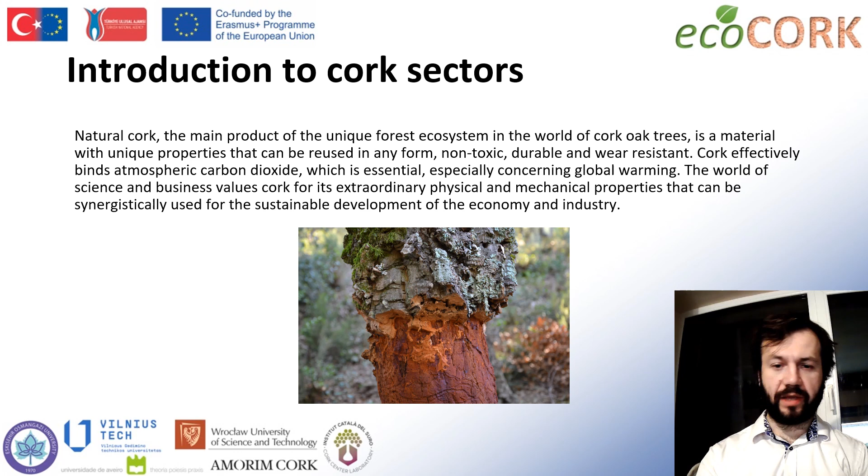The world of science and business values cork for its extraordinary physical and mechanical properties that can be synergistically used for sustainable development of economy and industry. Cork is a versatile and sustainable material with a wide range of uses in many industries. It is naturally waterproof, fire retardant, and environmentally friendly.

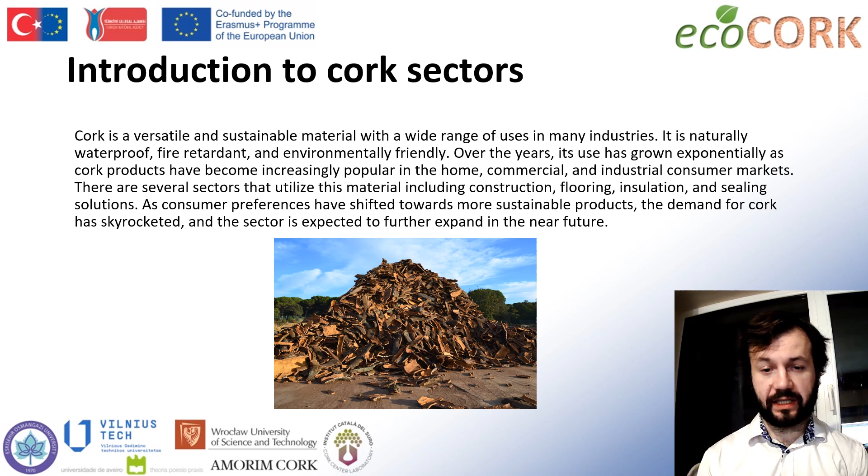Over the years, its use has grown exponentially as cork products have become increasingly popular in home, commercial, and industrial consumer markets. There are several sectors that utilize this material, including construction, flooring, insulation, and sealing solutions. As consumer preferences have shifted towards more sustainable products, the demand for cork has skyrocketed, and the sector is expecting to further expand in the near future.

In recent years, the cork industry is gaining new fields of industry. Cork as a material has fascinating properties which can significantly improve current designs. Fields of cork material applications are as wide as stoppers for still and sparkling wines and spirits, automotive and railways, micromobility, aerospace, sport, hand device interface finish, architecture and design applications, including floors and wall coverings, construction and infrastructure, such as cork underlayment, and fashion and furniture.

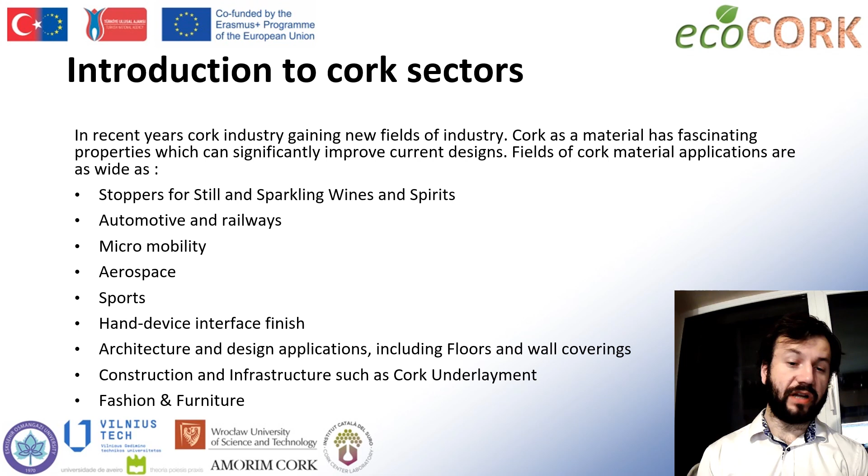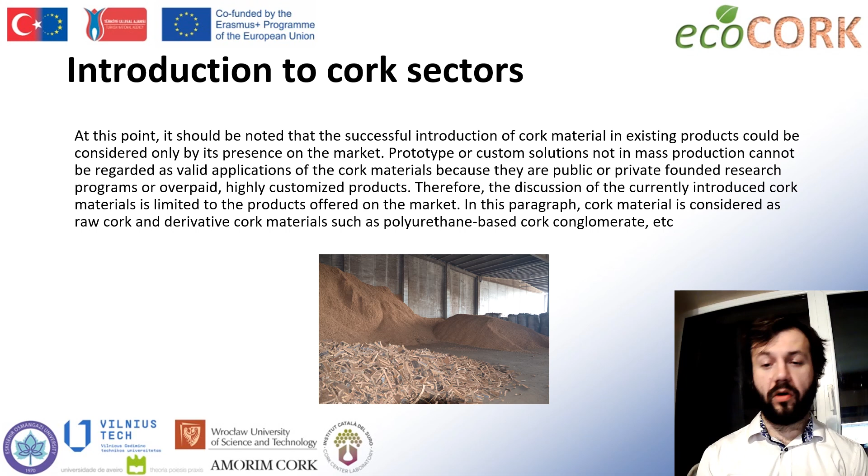At this point, it should be noted that the successful introduction of cork material in existing products could be considered only by its presence on the market. Prototype or custom solutions not in mass production cannot be regarded as a valid application of the cork material because they are public or private funded research programs or overpaid, highly customized products. Therefore, the discussion of the currently introduced cork material is limited to the products offered on the market. In this paragraph, cork material is considered as raw cork and derivative cork materials such as polyurethane-based cork conglomerate or other cork-based composites.

Cork is one of the most versatile natural materials. It has a wide range of applications from simple bottle caps to specialized aviation heat shields. It is light, compressible, elastic, durable, chemically and biologically resistant, non-toxic, flame retardant, practically impermeable to gases and liquids, shows good thermal and acoustic insulation properties, and it is also an excellent vibration and electric insulator. The unique cork properties result from its honeycomb-like cellular structure.

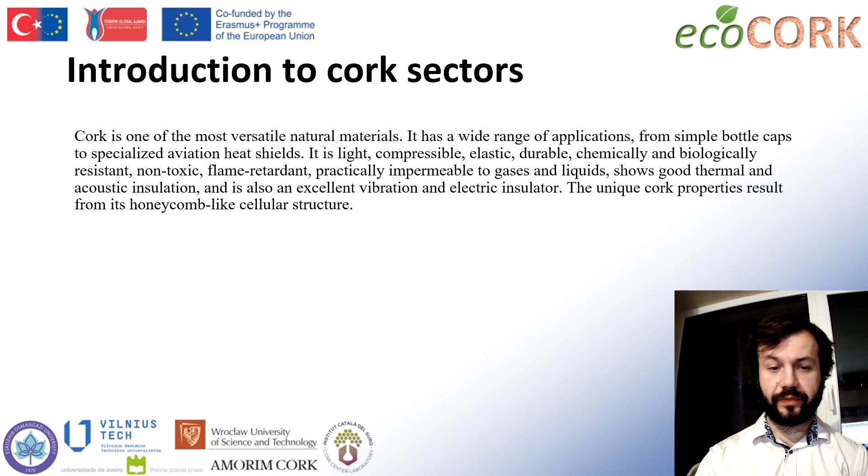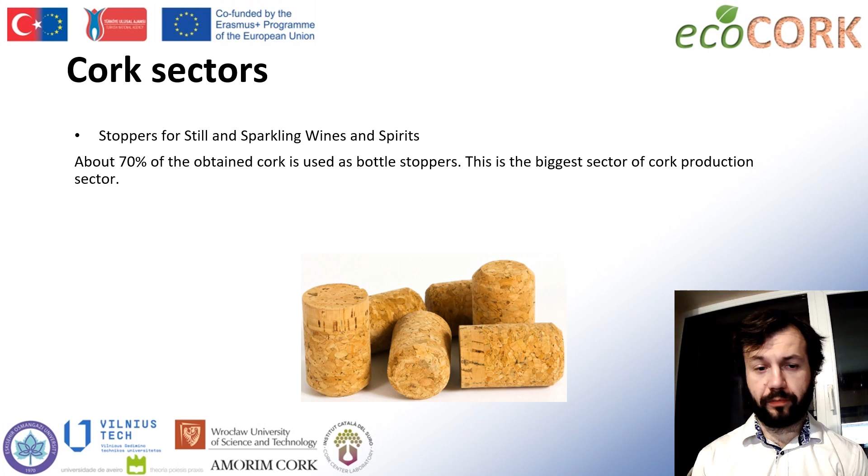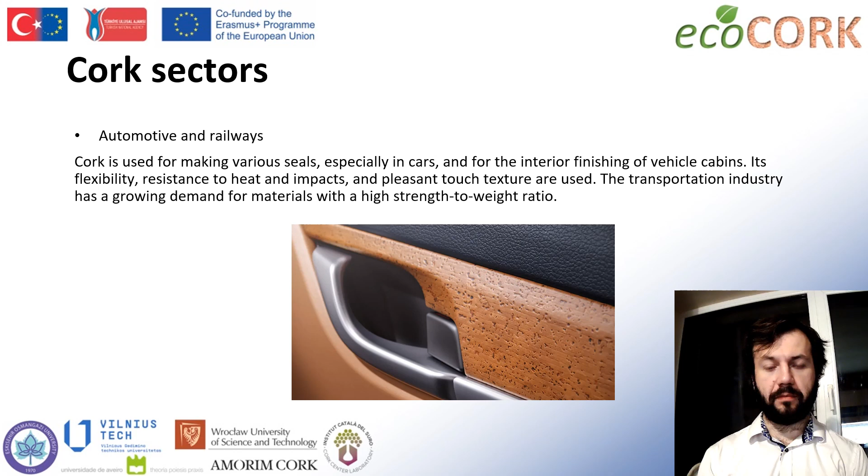Cork sectors. Stoppers for still and sparkling wines and spirits. About 70% of obtained cork is used as bottle stoppers. This is the biggest cork production sector. Automotive and railways. Cork is used for making various seals, especially in cars, and for the interior finishing of vehicle cabins. Its flexibility, resistance to heat and impact, and pleasant texture are used. The transportation industry has a growing demand for materials with a high strength to weight ratio.

Aerospace. Cork is assumed as a heat protection shield material for test missions where spacecraft will re-enter the Earth's atmosphere. During re-entry, each spacecraft experiences high thermal loads due to air friction against the spacecraft structure. During the Space Shuttle era, space shuttles were covered with ceramic panels. One of the hypotheses is that cork material might be used for re-entry shielding. Low burn regression and high thermal insulation properties at high temperatures have great potential for cheap and non-complicated manufacturing of heat shields for re-entry.

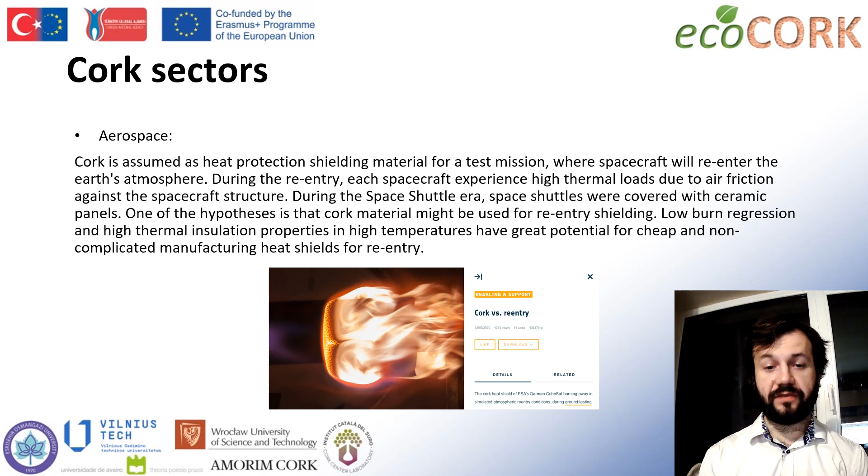Sports and hand device interface finish. Cork composites are prepared from agglomerates of various granulation, usually 0.5 to 30 mm grain size. The granules used are usually waste from the production of plugs. The granules are mixed with a reactive prepolymer and pressed at room temperature, or mixed with the polymer binder and pressed at elevated temperature under pressure to produce cork composites.

The intended properties of finished products depend on the dimension of cork granules, its mass fraction in the composition, which might be up to 90% by mass, the type of the binder, polyurethane, phenol formaldehyde resins, etc., and the packing density of the agglomerates used in the production process.

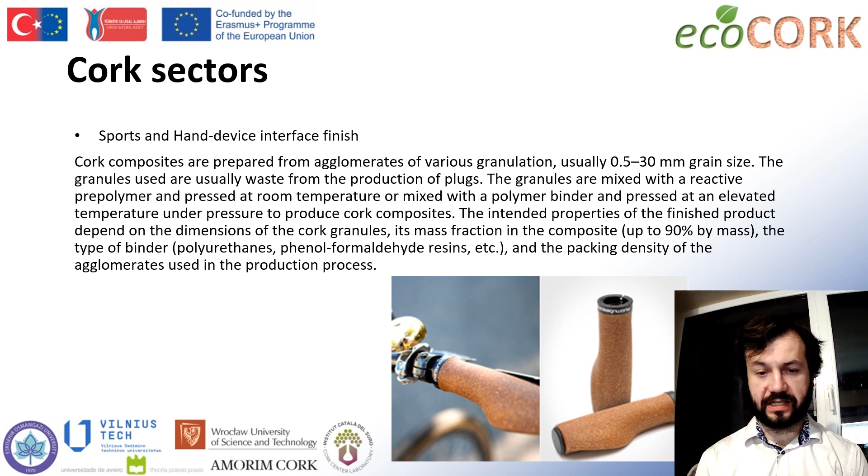Sport and hand device finish. In the continuing section, the block of cork agglomerate is produced as a laminate shaped according to the planned dimensions and smoothed. They are used to obtain panels, boards, shoe inserts, handles, grips, something you can see in the pictures. These are hand device interfaces where humans are touching devices with a nice and pleasant cork finish.

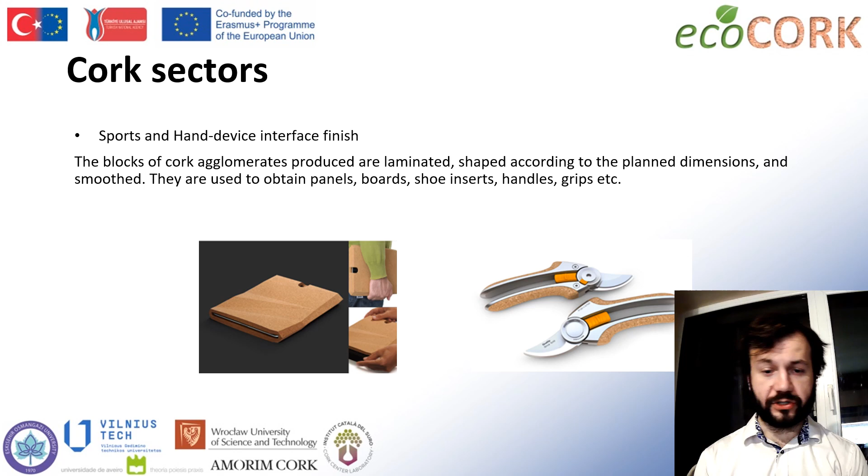Architecture and design applications including floor and wall coverings. The usage of cork in architecture is widespread. Due to its attractive structure and positive experience for the human hand, cork is very common in any type of architecture, from household accessories to major decorative roles in large buildings and artistic installations.

The construction industry is the second largest area where natural cork is used, in soundproofing walls, suspended ceilings, wallpapers, floor coverings in buildings, and insulation in industrial cold rooms. Cork is characterized by small thermal conductivity, sound propagation speed, and acoustic impedance, making it suitable for use as a material for thermal and sound insulation. The cork composite used in this way contains 90 to 95% cork by weight in a polyurethane matrix.

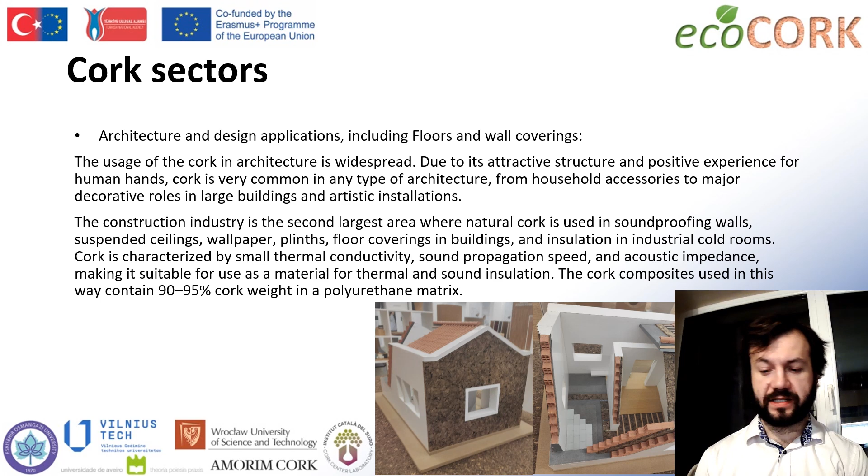Fashion and furniture. Cork material, recognized as a green and sustainable material, is widely used in the fashion industry. In this field, trends play a significant role, which is why the quantity of application will vary in the following years. Fields of application in the fashion industry are decorative, cork fabric, liners, shoemaking materials.

In this sector of economy, where manufacturing companies make strong declarations about ecological and sustainable material usage, it is expected that cork material with other natural-based materials will be more present.

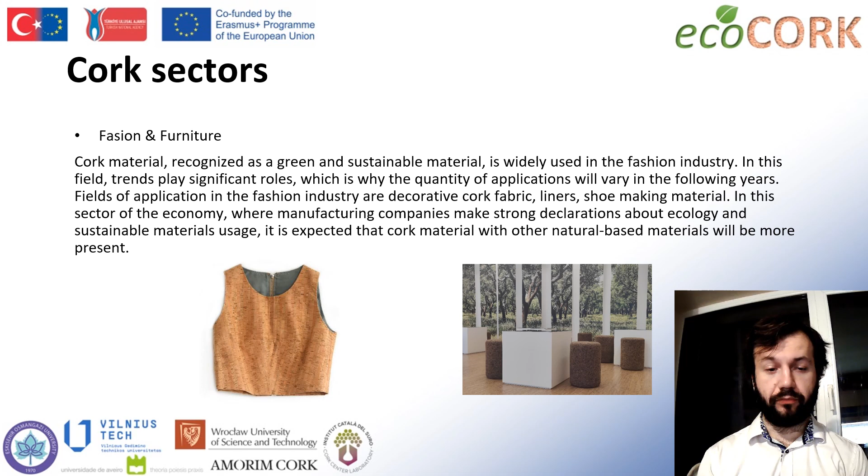And right now we will switch to a second section of this lesson presentation, Introduction to Future Trends for Cork. And we'll focus on the cork products driven by unique cork properties or combination of these properties.

Cork-based sandwich materials. This is a material which has aluminum skin with cork agglomerated core. Core materials are divided into natural or synthetic core material, such as wood, plywood, hemp, straw, or cork. The bottom left panel, which you can see here, is created with the balsa wood core material with perpendicular grain direction to the panel surface.

Two other panels are created with the synthetic cores that have aluminum honeycomb and the foam cores. The rest of the panels have cork cores. It is essential to mention that in the sandwich structure, volume of the core material may be up to 95% of entire material, thus ensuring a high degree of usage of eco and sustainable materials for the core is crucial.

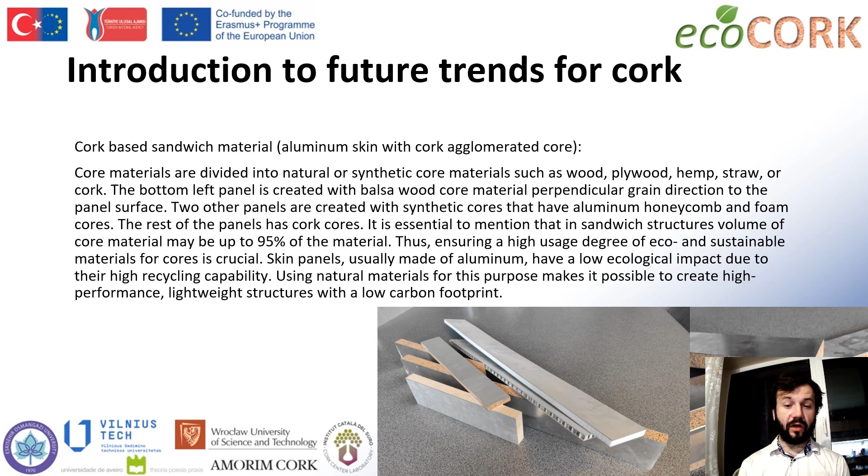Skin panels, usually made of aluminum, have a low ecological impact due to their high recycling capability. Using natural materials for this purpose makes it possible to create high-performance, lightweight structures with a low carbon footprint.

And this is a first case study, a case study for the lightweight panels which are suited for the fast rearrangement system for passenger train interior. The project assumption and design. So the lightweight panel structures are a good choice for quick rearrangement of the vehicle passenger space. They might be used for the temporary walls, floor, and ceilings. These kinds of panels usually are sandwich structures.

Outer panels are made of the skin material, ensuring rigidity and carrying most of the loads, while inside the core material is lightweight material and has a support role for the skin material. Core material is glued to the skin panel and prevents buckling.

At this point, it should be noted that neither skin panels nor core material can withstand even a small portion of the loads that properly glued sandwich material can, mostly due to the loss of stability, usually referred to as buckling. Okay.

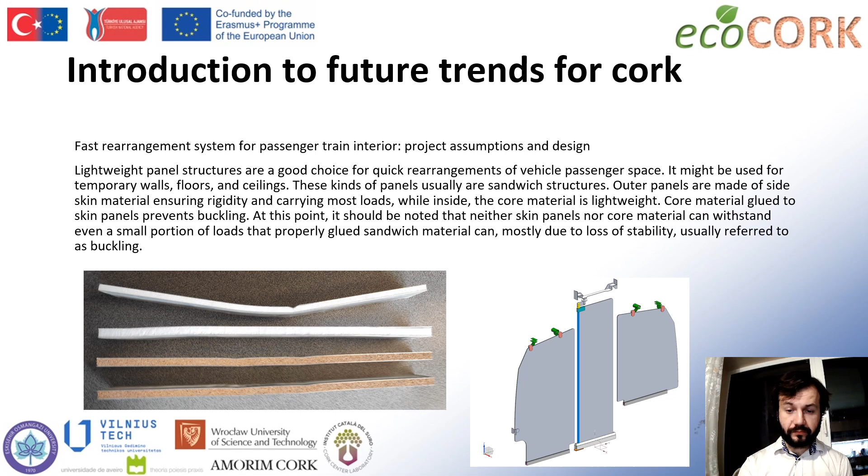And as a continuation of this case study, I would like to introduce finite element analysis, which allows determining stress in material and deformation of examined geometry against applied loads.

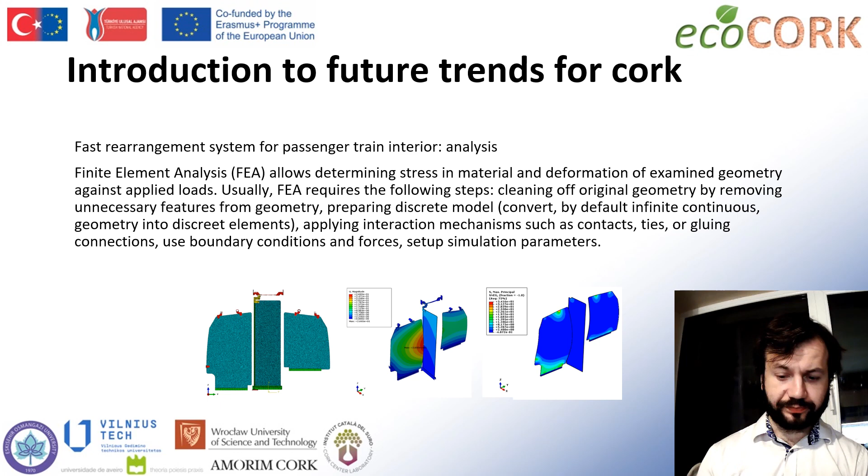Okay, moving forward to the second case study. Here it's a case study of the frontal protection system. So in this chapter we introduce the reader to the case study from the assumption to the final product, in which the authors present the approach to use the cork composite in the automotive sector. The research aimed to improve the safety of vulnerable road users by developing and implementing a frontal protection system which mitigates injuries during an accident with a vehicle.

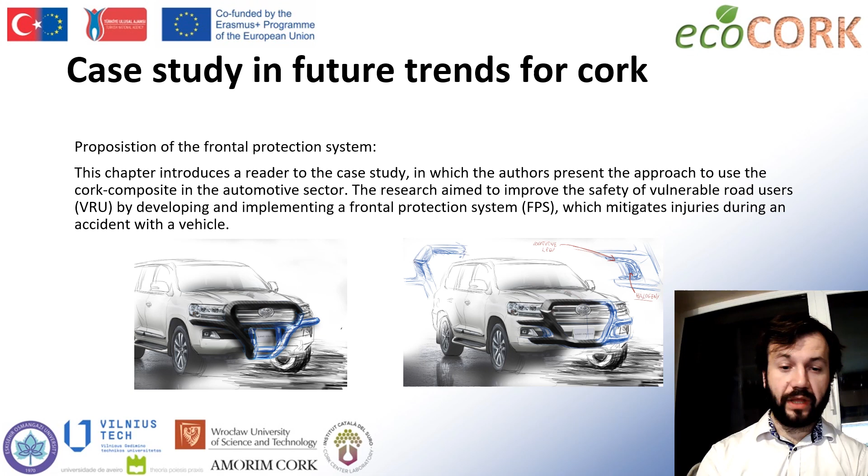Okay. So, due to the trend for the purchase of SUVs in Europe and their more frequent participation in accidents involving pedestrians and cyclists, as SUVs are commonly used in the cities, the authors identified a need for a safe frontal protection system.

The designed FPS provides pedestrians and cyclists with appropriate kinematics after collision with a vehicle, supported by numerical tests, while at the same time contributing to the reduction of injuries through the use of the appropriate energy absorbing materials. For example, natural materials, cork, and composites like carbon fiber.

As a part of the research, multivariate numerical models and physical prototypes were created and tested. This implementation of the combination of cork with the carbon fiber allowed the authors to substitute steel and aluminum alloys in this frontal protection system. It should be emphasized that development of the new FPS not only enhanced vulnerable road user safety, but also improved the design of the vehicle front end.

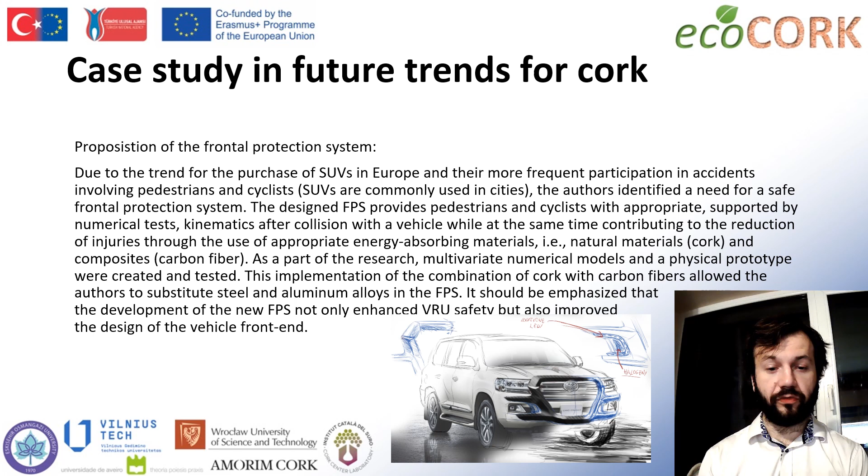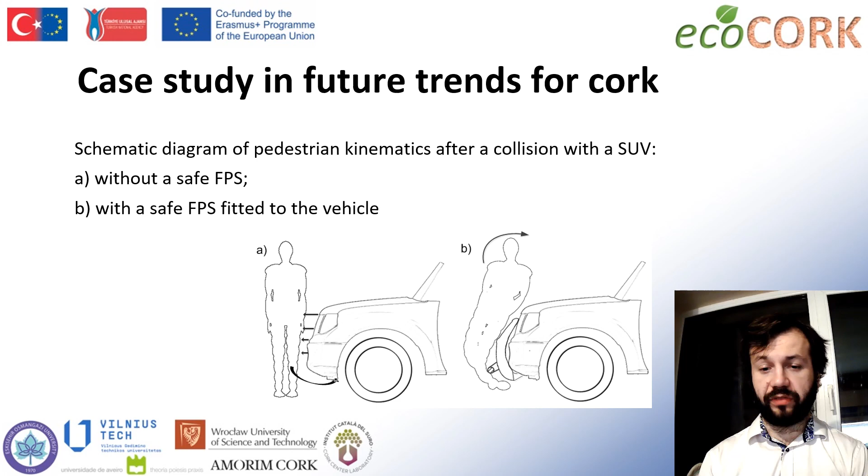Okay, at this point, reverse engineering and design steps have been taken as a subsequent stage. A 3D scan of the vehicle with the front belt removed was performed in order to recognize the mounting elements for the frontal protection system. The final result of the measurement is the combined point cloud from all scans, which is the basis for recreating the vehicle front-end geometry.

The obtained scanning tolerance after combining the point cloud was approximately 1 millimeter. It is the design basis for the modeling of the frontal protection system. Further detailed design works were carried out in computer-aided design software.

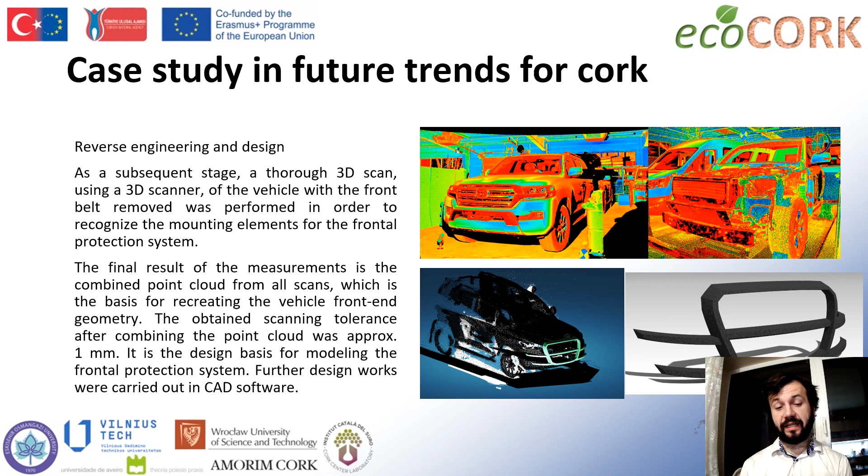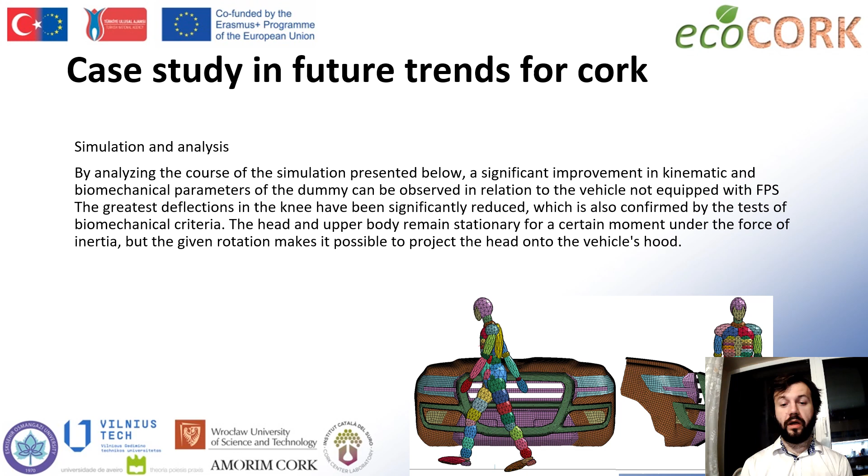The head and upper body remain stationary for a certain moment under the force of inertia, but the given rotation makes it possible to project the head onto the vehicle's hood. And we can observe a reduced deflection of the dummy cervical vertebrae, which reduces the likelihood of serious injury.

The course of the dummy kinematics makes it possible to use other systems that improve pedestrian safety, including a lifting mask with additional gas cushioning, such as an airbag to protect the head. The rotation given to the pedestrian also causes the pedestrian not to experience the maximum acceleration of the whole body in a short time.

In addition, the head acceleration does not exceed the standard parameter, and among others, the head injury criterion, which at the critical value of 1000 means serious injury close to death, while in simulation this parameter was below 100.

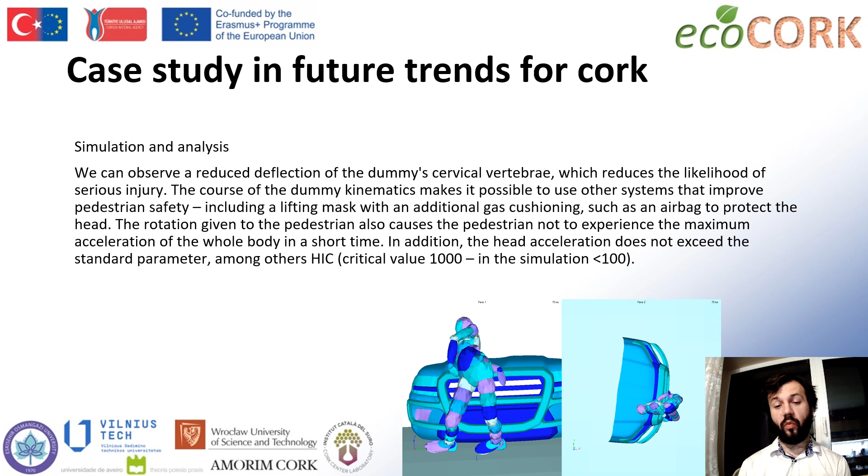Okay, various types of cork were tested, for example, natural cork, agglomerated cork composite with polyurethane, and cork filled with non-Newtonian fluid. Due to the minimization of head injuries during multiple impacts, especially in the motorcyclist case, different configurations of arrangement of different corks connected with glue were also investigated. Finally, a material model was developed which will be validated during the experimental test.

For the sake of FPS safety properties, the use of cork materials for the energy-absorbing FPS filling was the most reasonable choice. However, two types of reinforcement covering the cork material were considered: carbon or glass fiber. Carbon fibers are composed of structures almost entirely chemically similar to graphite.

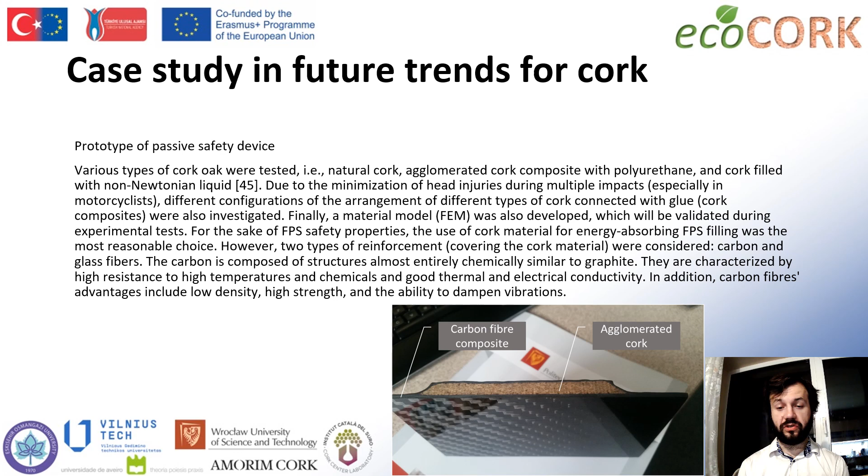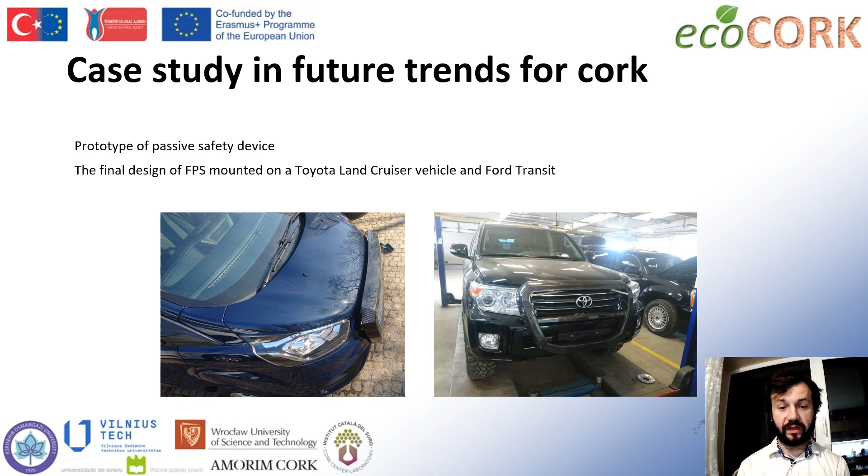They are characterized by high resistance to high temperatures and chemicals and good thermal and electrical conductivity. In addition, carbon fibers' advantages include low density, high strength, and the ability to dampen vibrations. And this is a look of the final design of FPS mounted on the Toyota Land Cruiser vehicle and Ford Transit.

Conclusions of the case study. The study aimed to improve the safety of pedestrians and cyclists by developing and implementing systems based on natural energy-consuming material. In this case study, a cork-cork FPS was designed and numerically tested.

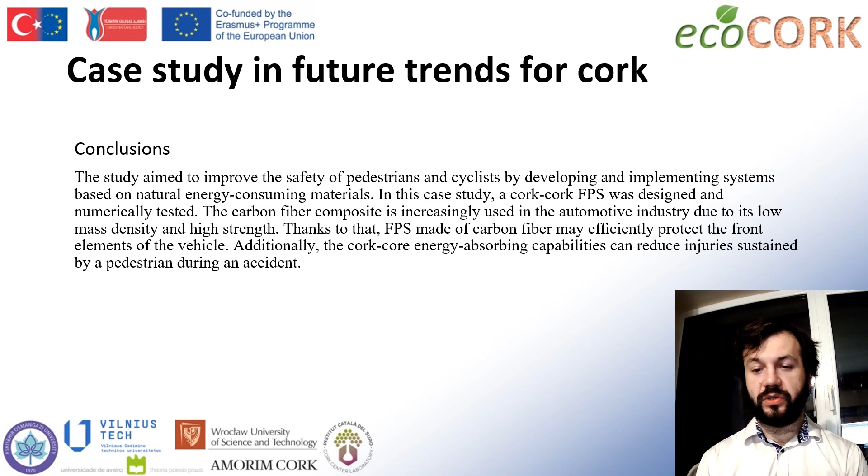Carbon fiber composite is increasingly used in the automotive industry due to its low mass density and high strength. Thanks to that, FPS made of carbon fiber may effectively protect the front elements of the vehicle. Additionally, the cork energy-absorbing capabilities can reduce injuries sustained by the pedestrian during an accident.

So, the summary: cork is a remarkable natural raw material with a unique combination of synergically reinforcing properties. It is suitable for various applications, from the typical bottle stopper to sophisticated thermal isolation shields for engines and rocket tanks.

Now, knowledge in modern material engineering enables the continuous expansion of the application area of cork and its composites, and research on innovative cork applications is also continued. Cork is a precious gift of nature that must be treated with respect and used as widely as possible, sustainably and ecologically.